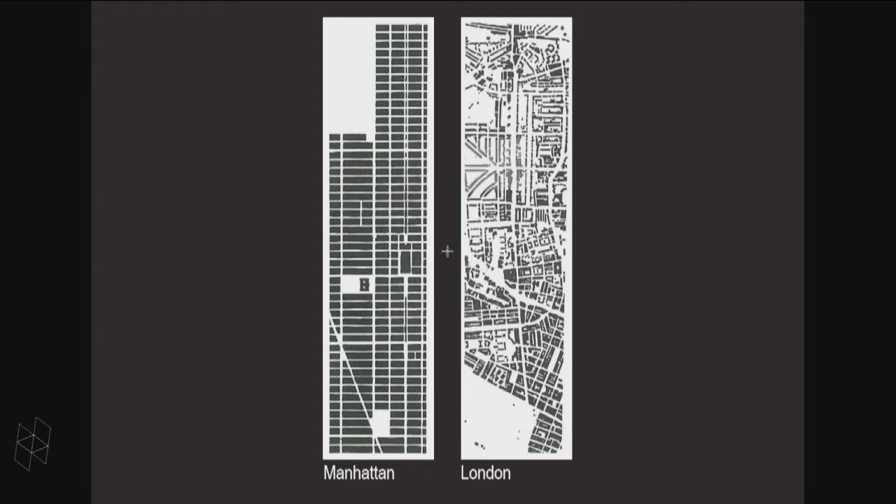In a sense, I think what architecture is always thinking about is how you play with the generic, which is the gridded city that's Manhattan, and the specific, which is the kind of uncertain collision of events that's London, and exploit that within your architecture.

I was with a very eminent architect on an architectural tour of buildings. We were in a rather rubbishy marquee that had a tent lining. He's built all over the world, and he turned to me and said, that's the problem—you can only do so much with architecture.

What he was really saying was this place we were in hadn't been designed, but it worked. That's not to say we shouldn't be designing things, but it suggests maybe we should be thinking about the limits of architecture.

Cedric Price had a story that he worked with a couple on a building for three months. They wanted an extension, and after three months he said, look, you don't need an extension, you need a divorce. The point was that a great school of architecture is helped by being in a great building, but probably more important is the culture of the students and the culture of the staff.

Architecture can do so much. I'm fascinated by it, but it can only do so much.

So universal use is something we talk about in the projects we're doing, and that's the idea of the irrelevance of planning constraints to talk about particular uses.

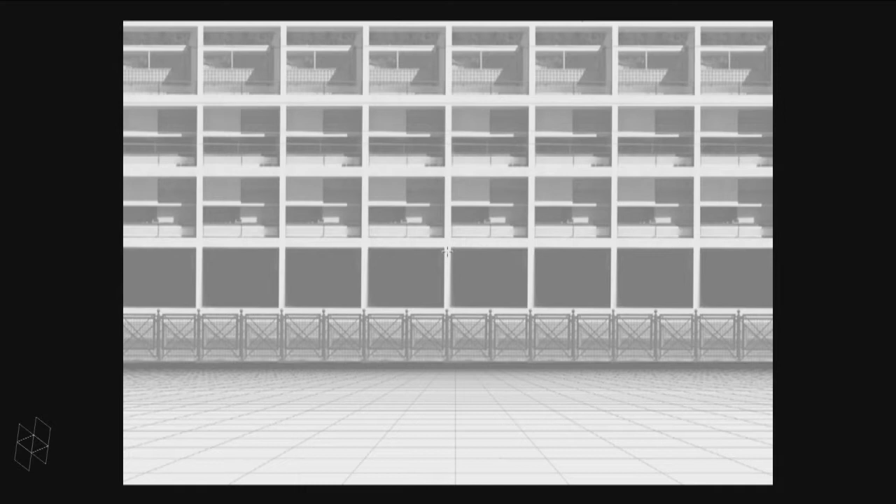We started thinking of this in a simple way that we drew up for an exhibition. It's about a field, a constraint, the idea that the architecture we make is the theatre of life—the physical frame, which might last 50 years, maybe 100. Then there are stage sets, the temporary projects of life that might last 5, 10, 15, 20 years. And then there are props, the reconfigurable components of people's life.

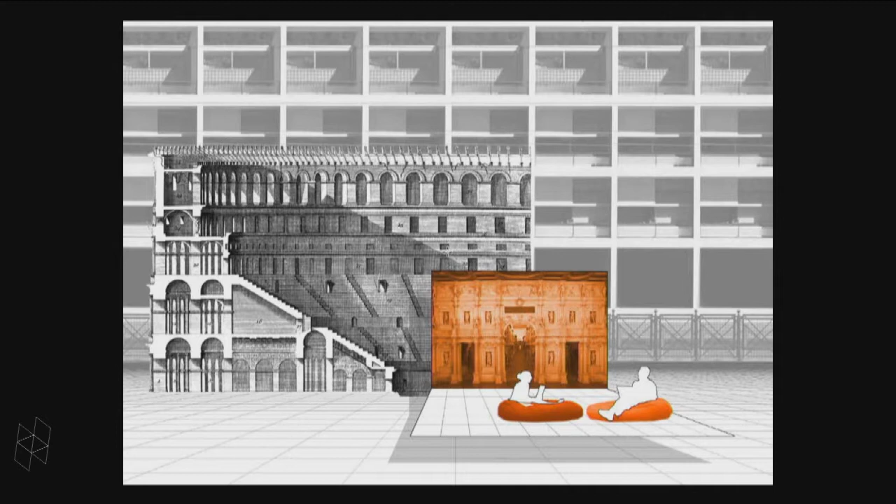When you design an apartment block for 400 people, as we do, you're not considering their props—you're making the theatre for their life. The stage set might be a swimming pool, a running track, or a garden on the roof. But it's that idea of how much do you want to control.

So what I'll now show you is a series of projects that talk about the journey—the idea of how you get to the other side. What are the things that drive your thinking?

I'll start by reflecting on some of the early projects we did and the ideas behind them, and then later I'll talk about some of the projects we're doing now and the forces that inform those ideas.

The first project we did, the classic project, was a house in a garden. It was a very tight, controlled vessel, as we saw it, for life—upside down, so the windows on the floor, a generic barn-like volume, but a very specific elevational tactic.

It had a swimming pool. It had some living accommodation. We've recently reworked this house—it's now a living room. Everyone walks in and says, how interesting that you put all the windows on the floor. We have to explain that wasn't the driving idea, but it also shows that the generic idea isn't actually enough, and the specific, if it's delightful, can allow you to do something else.

This is CASPAR, early social housing for a Quaker research organisation called Joseph Rowntree. It stands for city apartments, single people, affordable rents. We did this project with Hanif. It was very low cost, equivalent to $50,000 a unit, which in England was nothing. Hanif and I came up with the simple idea that the social space of the building was the most important thing.

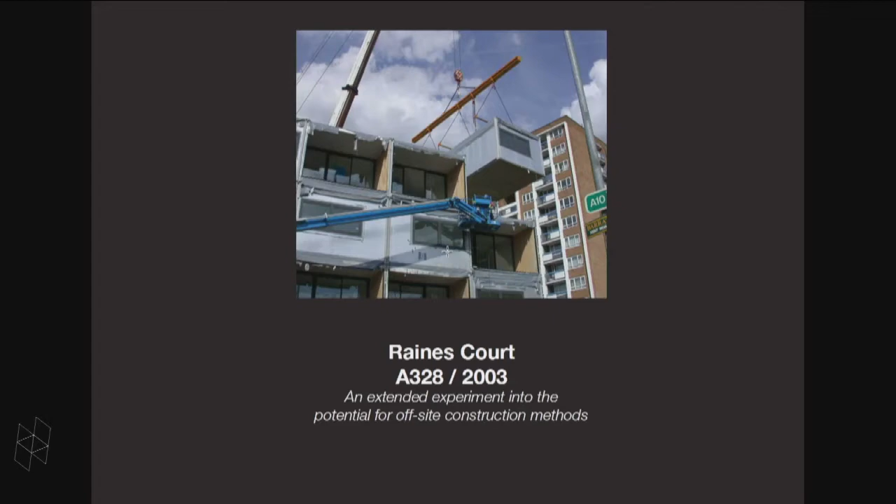Early on, another competition-winning scheme explored the idea of prefabrication. People talk about prefabricating or printing buildings in the new world. This was for Peabody, a social housing project. The idea was to use the discipline of prefabrication to develop a different kind of housing layout, so we weren't designing houses and then making prefabricated modules—we were starting with prefabricated modules and developing an idea of housing from them, incorporating everything into the building.

Then there was the idea that the social space, the streets in the sky—a bit like CASPAR—were a different way of thinking about it, allowing people to adapt, take over, transform and engage with their own space. So if buildings are always becoming, our buildings are going to be adapted.

When I began, working on historical buildings was of less interest to me, but increasingly, the moment we get given a site, I think much more about what we've got and what we can do. It might be a clear site, in which case there are invisible constraints, or in this case, a site a client bought: five different buildings, a series of warehouses, none aligned. In a way, it's an architectural version of the map of London—nothing's been planned, there's a kind of chaos and a set of conflicts, but you can harness that.

Then, wherever possible, we exploited the fact that there was an industrial roof with a lightweight north light system. We could strip that off, take technology from sports centres, and make a removable roof. As the building became more successful—we've been working on it non-stop for 15 years—we could add a swimming pool, a series of gardens, and other elements.

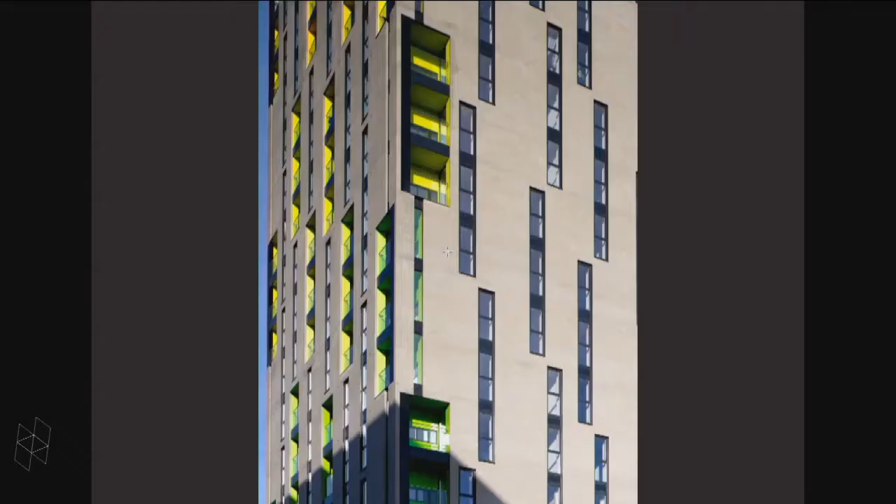In this case, collaborating with MUF, landscape architects. And then the idea that we would master plan the building and bring social spaces into it. We'd create a new library, some new high-rise, very simple low-cost building, some new residential, and a hotel.

Projects spin across time to each other - again, this is the discipline of making. This is Adelaide Wharf, which was an interesting government-promoted idea that we needed to provide housing in London. We've always needed to provide housing in London.

If you read the post-war reports, they'll say 4 million new houses required over the next 20 years. If you read the reports now, they'll say the same - 4 million houses required over the next 20 years. There must be a secret network of living going on in London, because you don't find people sleeping rough. There is a kind of black market that exists, a subculture of accommodation.

But Adelaide Wharf was about building private, social, and what they call intermediate - which is a mix - all in the same block around the same social space. Again, working with Hanif, it's on the canal in Hackney, which was then a tough place that's now a rather wealthy place as the city spreads out.

The discipline here was to not do what we did at Raines Court, which was to use prefabricated modules, but to see if everything could be made using industrial systems. So even the reinforced concrete frame is a standardized rollout construction. The balconies were made in the north of England, the facade was made in Czechoslovakia. Everything is an assemblage, but made very specific to its site, its waterside site.

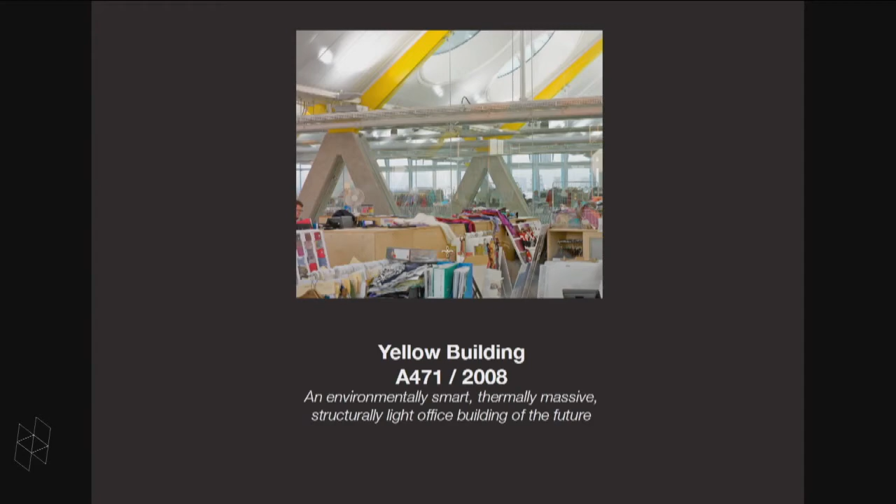The opposite of what happened at the Barbican: here art is dispersed throughout the building as a kind of subliminal visual and cultural messaging, communication to the staff about the thinking underpinning what they might be doing in design.

It's in central West London—there's Mario Testino's studio in the foreground. It's a very simple industrial shed, but over eight floors.

It's a series of tight spaces we're trying to make, to contrast with the loose, large space of the motorway. Internally we developed the idea of a bespoke handmade frame, contrasting with all the work we've done on prefabrication, using the skill of the maker, the formwork chippy. Hanif's team came up with a very simple idea: the structure would basically stay the same width, but you'd play with the way you position the formwork, so as you moved up the building the structure would get lighter—expressing the load patterns.

It's cheaper not to express the load patterns, but we felt we'd stripped architecture away completely within the building, and it was pure structure. The structure is the architecture of the building.

Here you see within the building, 15 metre—or 50-foot—floor plates pulled apart, not unlike that Kaster housing project, but again with a similar idea of circulation through the middle, a series of staircases.

This is the cast and hollow, one of the art pieces, and then the idea of the visual connection—one of the biggest challenges on this project, again that idea about detail and research. The more you make, the more you're able to push constraints. This is a single fire envelope, so we didn't have to subdivide the building up; we could allow the atrium to be the air return for the air conditioning, and it could also deal with fire. Here you see the visual chaos of the floor, and the art embedded and scattered throughout the project.

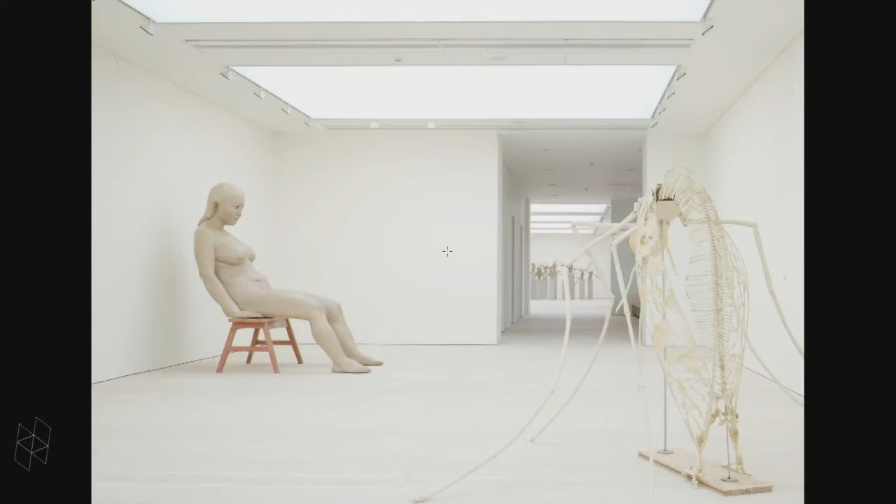The only distinguishing thing about this building, apart from the difficult technology of inserting these spaces into the found structure, was the idea that the entire circulation system, unlike many galleries, would be through the galleries itself. It's very much an idea of architecture as the background to his collection, which you'll notice is very minimal in its presentation.

This was actually a double-height office space - in fact Hanif was using this as an office when we got involved and asked to take up various floors within it.

And then again, reappropriating - this is Richard Wilson's art, a very specific piece he'd made in the previous gallery that was then reconfigured. It's a kind of 2mm viscous oil reflective surface reconfigured into the basement. This idea of use and reuse, and then the idea of the Nolli plan and public space.

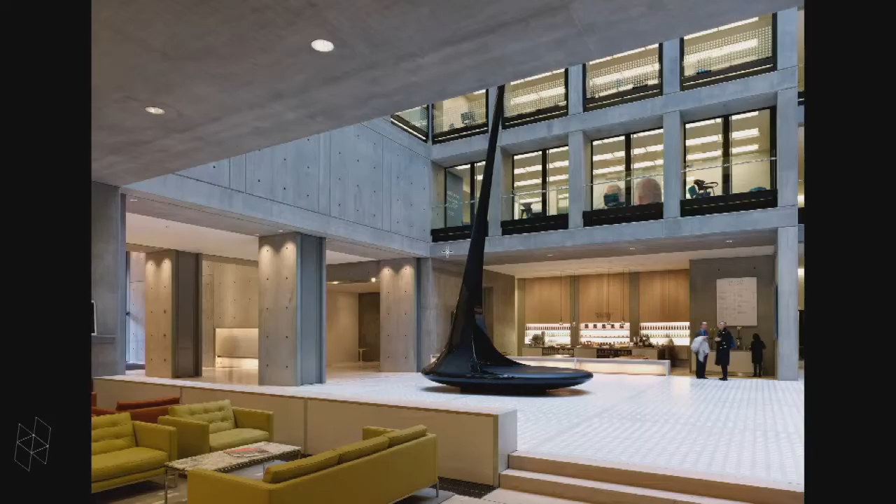This is an office building. We extended it, reworked it, and had this idea of pushing security further and further back into the building so that the atrium we'd created in what was a former courtyard - we doubled the amount of building on the site, but almost invisibly - would become a public room within that would make the offices valuable, but also engage with the city.

And then this idea of endless visual connection. And again, in a sense, it's our tribute to the Bradbury Building - architecturally different, but it's the idea of a promenade of public circulation through a private building, ending up on a public roof terrace.

The idea of making money to make architecture means you balance and play with the scales of projects you're working with. This is a hospice in London.

Again, a little competition win. Very tricky project, not because we wanted to deinstitutionalize this and make it almost feel like a large house, but the guidelines are all about germs. Bear in mind that people are very weak after serious cancer treatments and they're terminally ill. But it was really very much about trying to pick up on the domestic scale of the area.

Bring natural materials into the house. But the small business of bringing bricks with mortar into a house, a hospice, required someone for about 3 or 4 months to prove that this was not a germ trap. It's a tiny thing, but it's that idea about detail in architecture driving what you do.

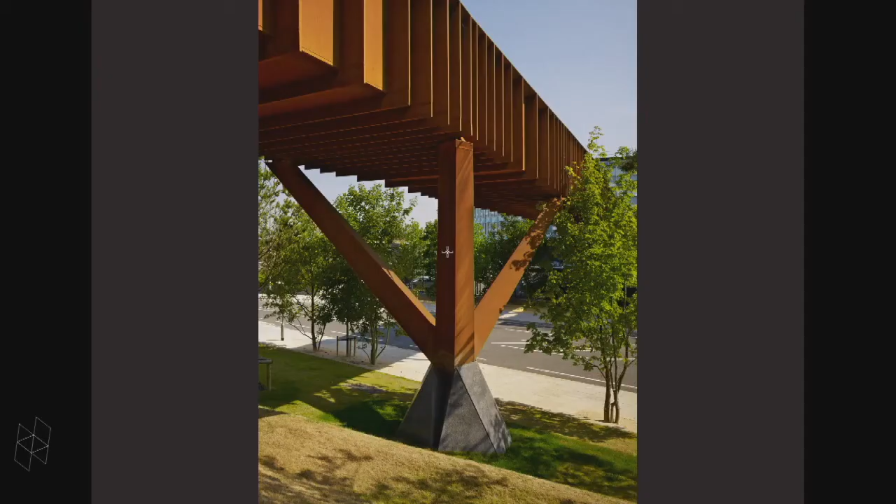And then working with Hanif on the whole project, but also this idea of a bridge as a simple expression of an entrance into the place, and also expressing the stress, tension and spanning potential of the structure. I talked about stage sets.

This is London's greatest stage set. It's Regent Street, an extraordinary place in that it was built really for these buildings, and these very grand facades were only 8 foot thick. So they were 1 room thick grand facades of great palazzos, replacing John Nash's original design.

So what's happened over the last 15 years is all of Regent Street, which still looks like this, has been completely rebuilt behind. We worked on 2 buildings and 3 public spaces, and you see the odd new element of new building coming through. And then in side streets, this is Keith Tyson, Turner Prize-winning artist.

And then here's this idea of highly valuable real estate, a naturally ventilated office building with a triple glazed skin - a very expensive way of making a building, but this is a very, very valuable part of London. The client is called the Crown Estate. Ultimately the money goes to the government, but it used to be owned by the Queen. They've owned the land since 1066, so if they can't make a long-term play on architecture, no one can.

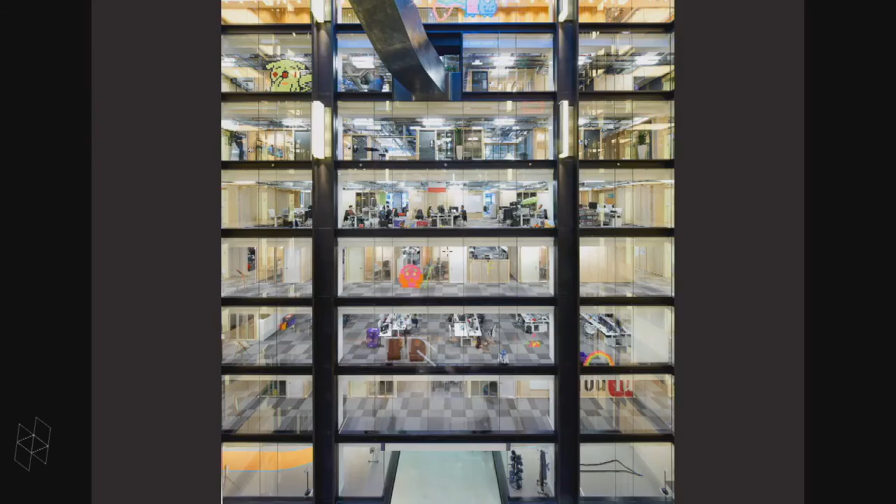So this project was really about stripping a building back to its shell, creating a series of pieces of furniture, creating a promenade that dealt with a disconnect of an atrium in a building they found themselves in that none of us had designed or thought was particularly of great merit. And then making sure that this journey through the building, like the journey through the city, like the journey through the Bradbury building, was actually a kind of urban journey.

And then it was about developing a simple idea that where does architecture exist in the world of interiors? To us, it existed in an idea about CNC routers and demountable rooms that could be taken down and reconfigured by the individuals who work there, rather than the appearance of change.

This is real change. So we designed a simple room that took about a year to perfect. And the idea is we ordered 200 up from a large joinery company, but you could order one cassette up via CNC router from a very small business.

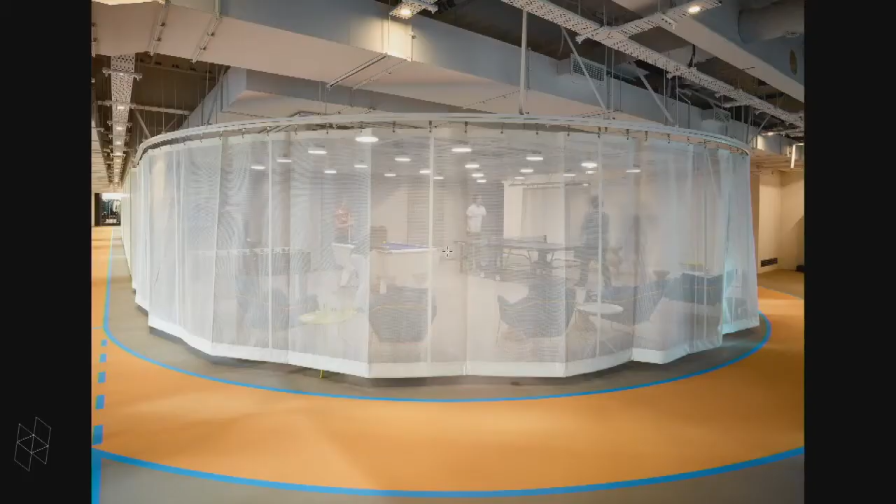We called it Project Jack. It's an idea of demountable, easily handleable components. And then that idea of Jack ran through to all the elements we installed in the building, all the furniture. So the idea of taking architecture down to a much more detailed level.

And this, in a way, was an exercise in the idea of rather than theatre or stage set, but in the idea of props. There's the classic, obvious symbol of the off-the-shelf sleeping pod that I don't think anyone's ever used.

Reuse again, in Liverpool, a theatre, no budget, quite a fine 1920s building. We created a new street frontage that didn't exist, stripped the building back to its minimum, and again, in this Jack-like idea, inserted a series of pieces of furniture, and then really just got back to the idea of what we'd call a zero finishes building, which again is a lesson that feeds into our new buildings.

And then, of course, this is a kind of architecture imitating art. This is an Edward Hopper Nighthawks-like shot, but with a slightly less glamorous casino in the background.

By contrast, but at the same time, we were working on New Scotland Yard, which is a highly complex, secure government building, next to Norman Shaw's buildings. This is Curtis Green, and this is kind of pure architectural technology—structure-free, bomb-proof glass, about 4 inches thick. So what we're trying to do is make a very public building from a very secure site.

It was launched on the day of the attack on Westminster Bridge, so the eternal flame is an important symbol of the challenge of security. But in a way, this is the most extreme version. All buildings have this kind of fear of public engagement.

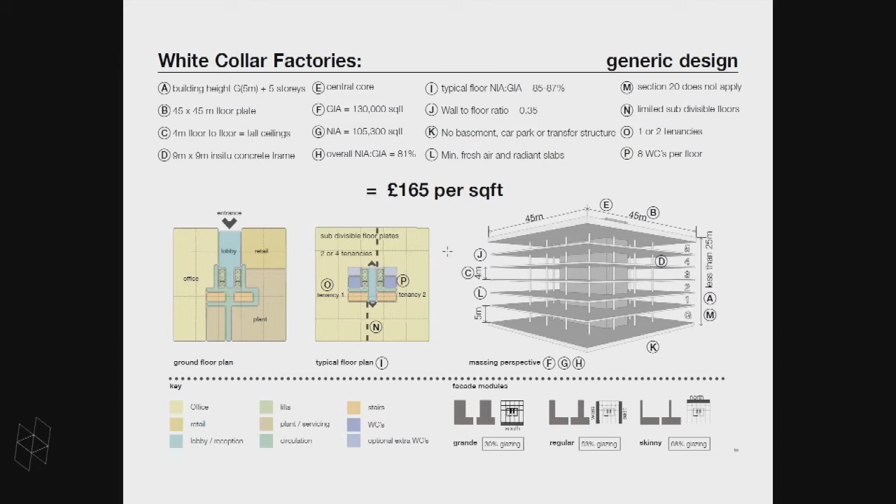We treated it as a research project. For 2 years, we worked on the idealized building. We knew we'd never build this idealized building, but it was a kind of structural, architectural and environmental testing system. We then arrived on a site in London where this idea of efficiency becomes something quite different.

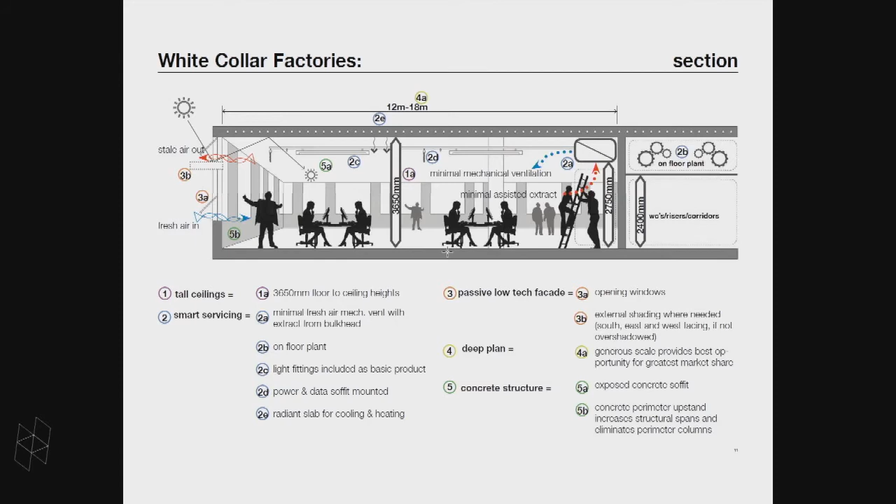The core moves, the walls change, the building's articulated in different ways, but the fundamental moves are still there because we know that site and constraint is always going to be part of making architecture. The environmental strategy remains. The building then moves to a particular place, which is Silicon Roundabout in Old Street.

There's a taller building. There's 5 other buildings, 3 new ones, 2 retained. We work through a series of models, and because we've worked with the same client for 20 years, we persuade them to build a £1.5 million mock-up, jacked up 20 metres in the air, to test the way you make the building. But actually, economically, if you're building £200 million worth of construction, this kind of thing is incredibly useful.

I think those measures are useful checks, but they're not the driver. It's a very solid building, but actually quite light within. It has this kind of light filtering system that also allows for natural ventilation and takes the wind and the edges off it. It exposes its making at the ground.

The system above is an industrial facade system, but detail comes into the building in terms of the castings and how we make the concrete, how the system breaks down, where the core engages with the wall, and then the idea of the interior space, this idea of convergence. So the structure is the finish, is the space.

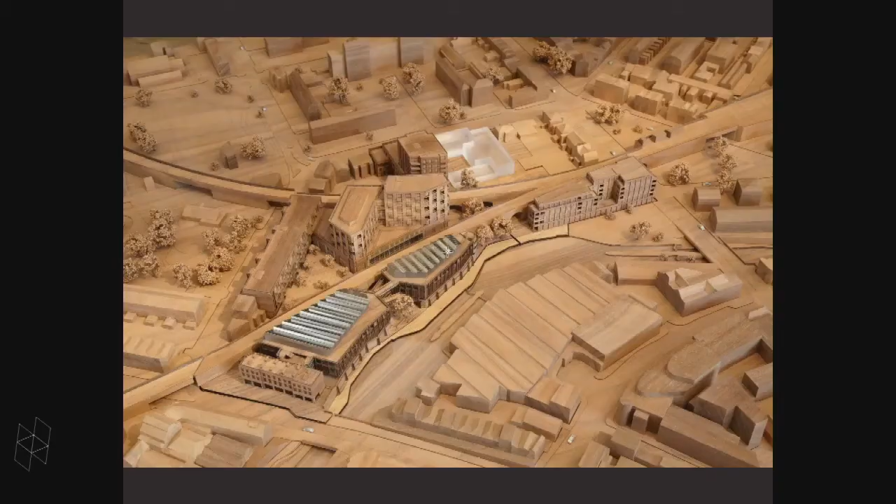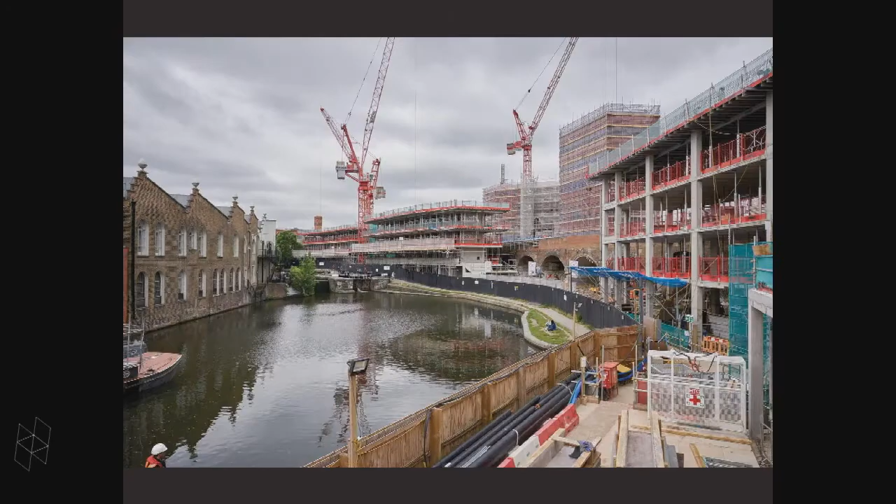And that really is, what intrigues us is putting suites of buildings together now. This is Camden Town, mixed uses, kind of a palette of different materials. Already this client is changing this from a market building into an office building. And then this complexity of making an industrial infrastructure and railway lines running through is kind of beneficially challenging the way we think about aggregating buildings.

And then here's this idea about universal space with a 12-metre deep basement in a top-down, bottom-up construction.

The last two projects I'll show are really about reuse, but on a kind of much bigger scale, and what it can bring to the city.

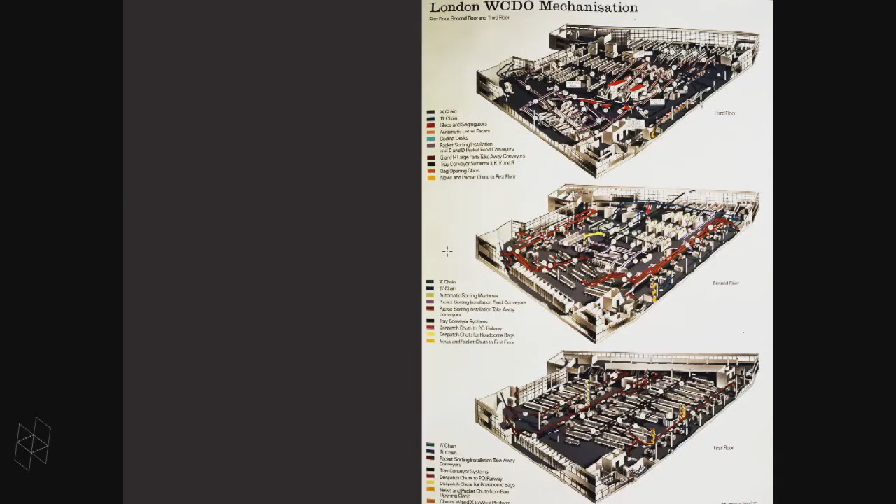It has an underground railway line that links it to London. We have to keep that open. It's used for data and cable transfers. It's a rather anonymous but quite intriguing building. But what distinguishes it and is unique is it has 6 metre, or 19 foot, floor-to-ceiling heights.

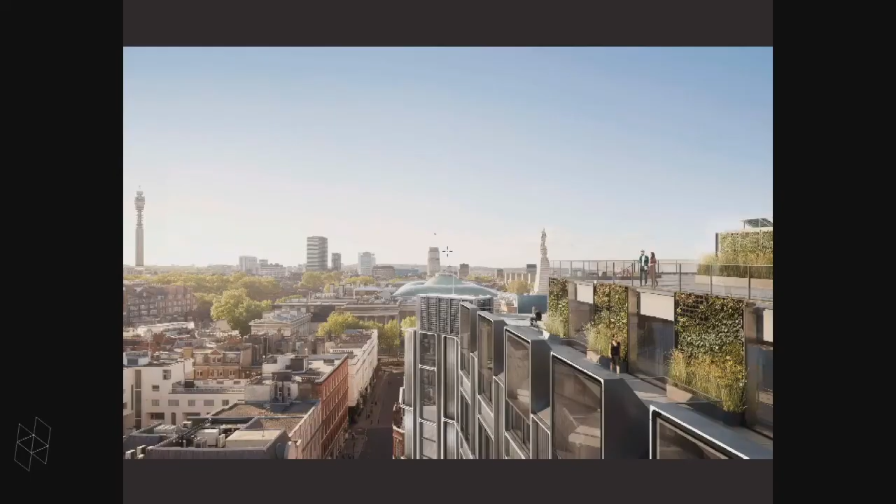And then there's an interesting idea in London that the strange brief for this site is 500,000 square foot of office space and 50 social housing units and a public roof garden. It's kind of weird and absurd, but what happens is you get McKinsey's on the top worrying that people can look in the windows and see what they're doing, and then you've got the social housing tenants right underneath them.

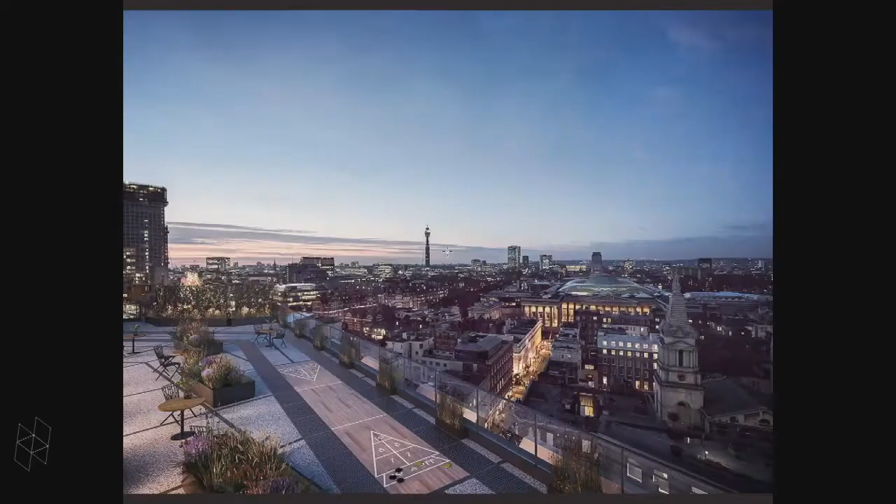So it's that kind of strange juxtaposition, and again, this idea of a layered city and bringing public space through the city and then creating this public garden and shuffleboard and track within the city.

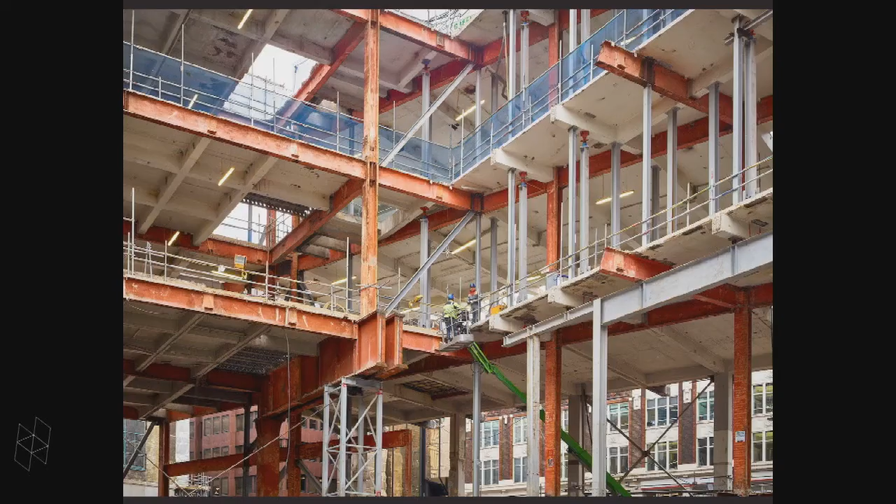And then the making of it is consuming 20 architects for the next 3 years. And the retention of the structure is a kind of absurdity, but we knew the moment you took it down, you'd never get the volume back.

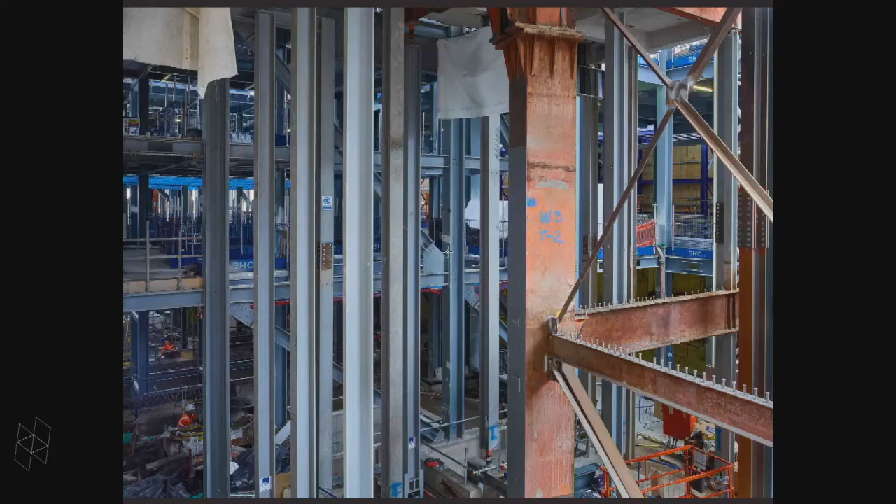So we've persuaded the client through various devices, also on the basis that there is something about the uniqueness, the specific of having 1 acre floor plates on a volume and scale that's not known.

The last project I'm going to talk about is about slow architecture and time. This is the timeline of a project that we started in late 2006. Here, 10 years on, we're a year and a half off starting on site. It's right in the middle of London, at the junction of Tottenham Court Road and Oxford Street.

There was a theatre on the site. A thing called Crossrail came along, and Crossrail is infrastructure. What happens when you make infrastructure is you lose the buildings above where you come out of that infrastructure. This is what we're doing, so it's eye of a needle stuff.

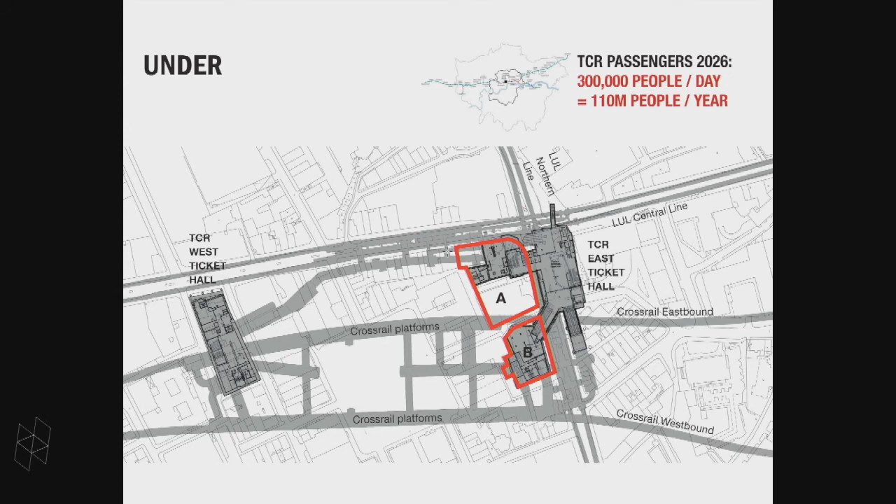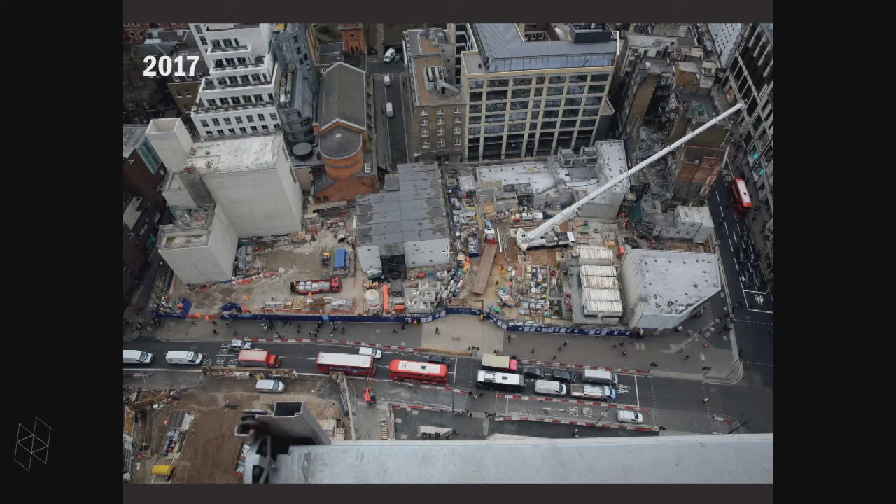There's a new theatre, a new office building. This is the site now. And what we have is a kind of industrial watchmaking. You have a vibrating fan with 120 decibel noise coming out and a new 600-seat auditorium within 4 inches of that. So it's very, very precise and very, very difficult.

But again, there's the idea of the public theatre and the public office coming through and connecting up. The benefit of the research and a large team is that it's the most complex BIM model we've ever made. I'm not obsessed with BIM, but when you're dealing with this much below ground, it's essential.

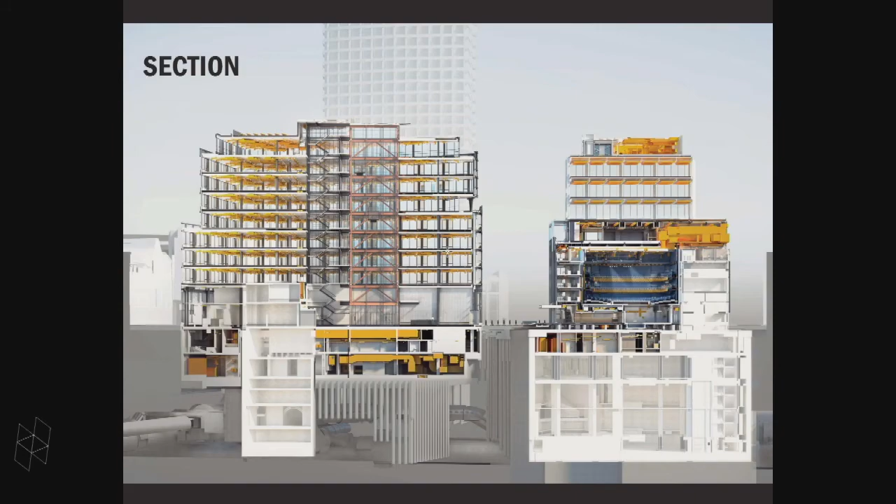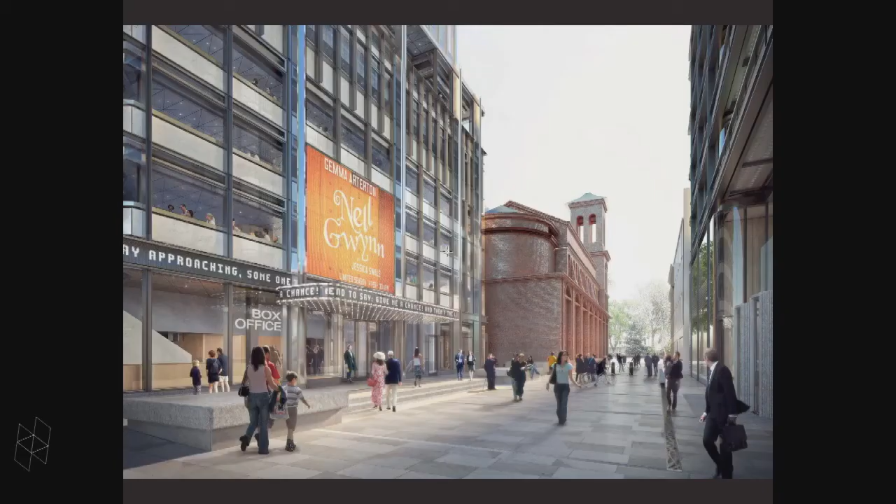This is the building as it begins to appear within the city, the public space of the office, the expression of the making of it, the idea of the roof terrace, working with an artist on a new public space and the link to Soho Square, revealing a listed church, the theatre itself with its alabaster trims, the box within 2 meters of the edges, and then this very flexible auditorium within. So it contrasts very much with that watchmaking idea.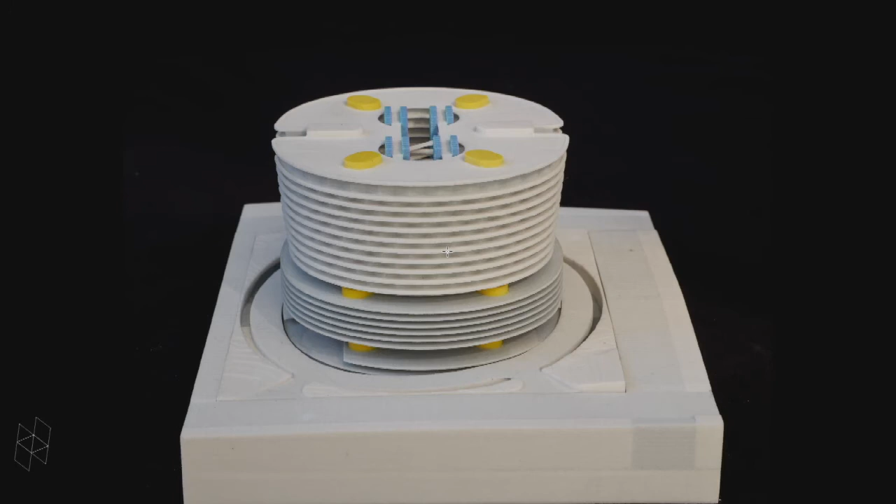When I went to Ahmedabad on a tour of India, I saw the Mill Owners' Building by Le Corbusier, and we were asked to work on this project, which is 1.5 million square feet of offices, 2.5 million square feet of accommodation, with the idea of could we make a building out of only 4 components: concrete, lifting technology, a recessed glazed facade, and a floor-by-floor plant system.

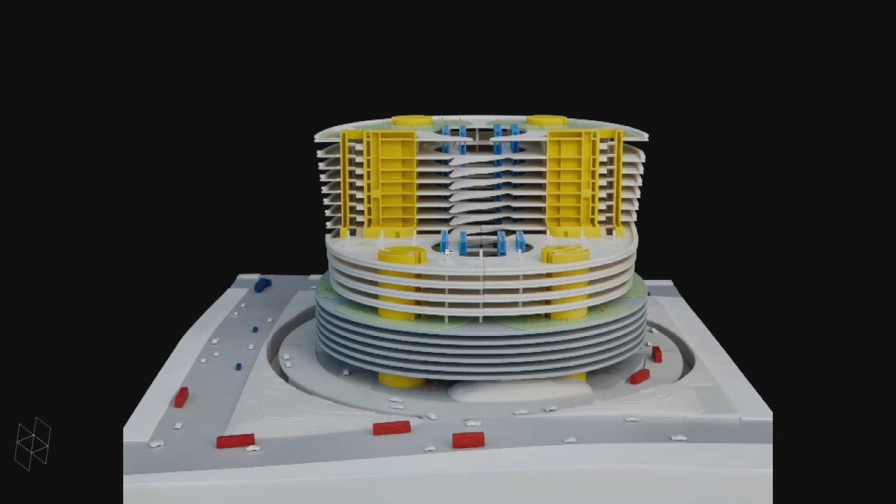In the sense we've pursued this model, we've resisted other devices and pursued it only through the kind of technology of 3D printing and casting, and then developing organisational ideas for the phase construction of this project, of which this is the latest iteration.

I'll end with that image, which is a promise of living, which is really just to say that what's interesting for us, being 400 people around the world, is that we've opened an office in Oklahoma 12 years ago because someone told me that they came from Oklahoma and they thought it was an interesting place. It is an interesting place. It's kind of not known by many Americans, and it's certainly not known by me till I went there.

But what's been very interesting is displacing ourselves, the comfort level we're in, working in Europe and even India, which we kind of understand, and then coming to a kind of classic burnt-out white flight American city, and being immensely surprised by the ambition of people there to rebuild and rethink their city. So that idea of always displacing yourself, whether you're going for 5 weeks or 5 years, is I think the greatest asset to creativity.

Thank you very much.